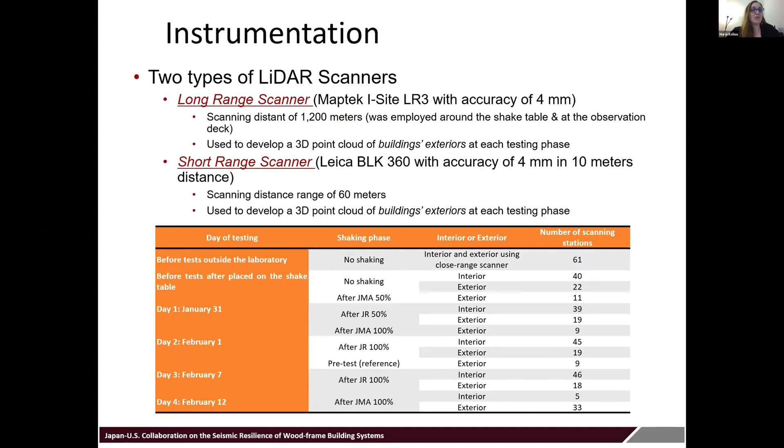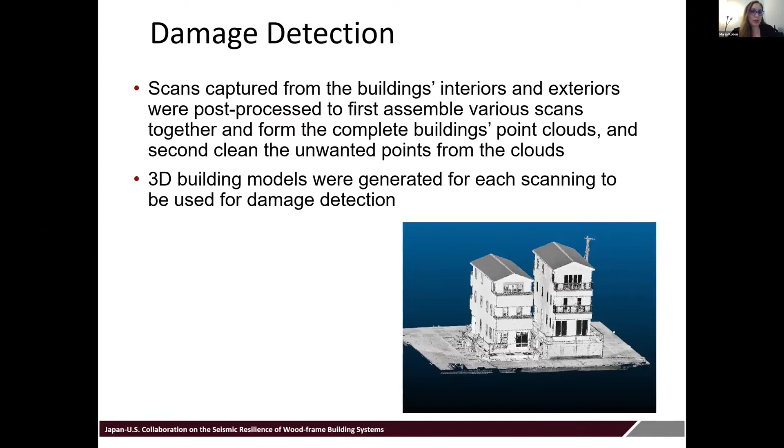As a few sample results in the next slide, we have that last day, which was 100% Kobe, and that's, I think, building B. You see the distorted column after the last day of testing on the left side. In figure A, you can see the photograph taken by a camera, and at B, you can see a screenshot of the column from the LiDAR point cloud. So we could actually measure how much the distorted column had moved in terms of the angle.

Also in the next slide, another type of measurement that we could perform with the point cloud was the damage to the 2 bracing elements. You can see at figures A and C are the photographs, and B and D are what we actually got out of the point cloud. So we could measure out of plane deformation in figure B, as well as the cracks that we could have in the bracing in figure D of the wood bracing.

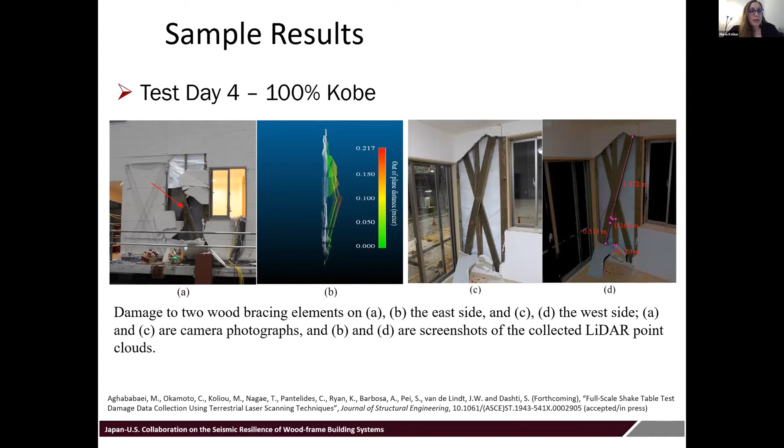In the next slide, another type of results and measurements that we could identify was from the 3D models. We could identify crack patterns. And this is the same test day. So you can see here on the right hand of the figures, we have the photographs, and on the left hand, we have actually the point cloud. So you can see that we have identified all the different cracks, and with yellow triangles, you can see the area that fell out, that actually got removed or damaged from the test. And in the next slide, this is from building A. This is from building B, which was less damaged than the last shake table test.

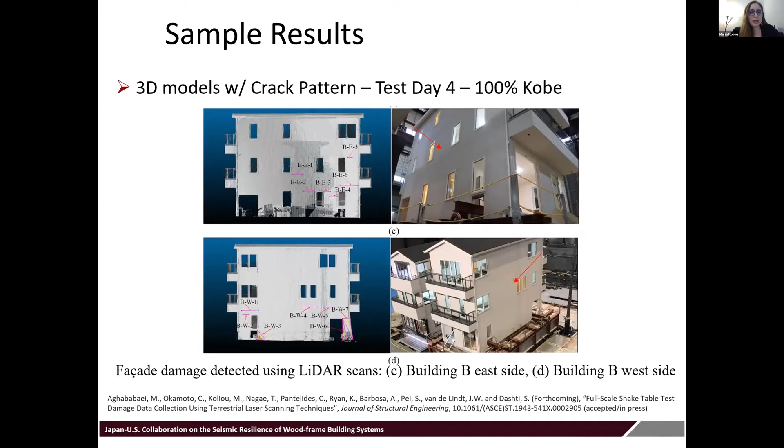In the next slide, we could measure the length of the different cracks and damaged areas as well. We have provided all that in the journal paper, Journal of Structural Engineering, which is in press, coming out soon. That was a collaboration in publication with Professor Nagae.

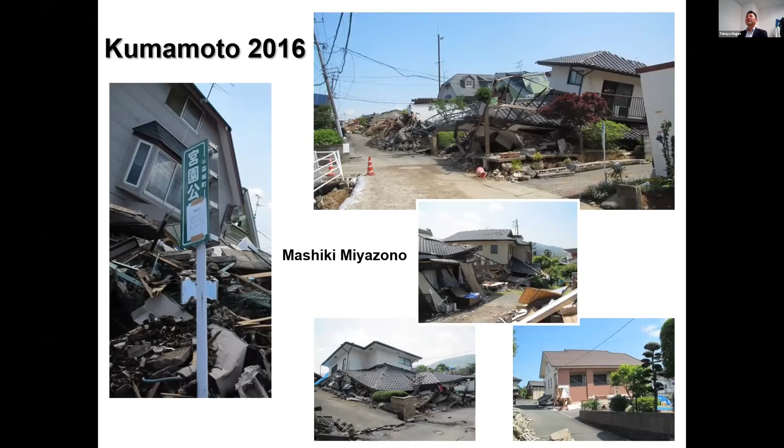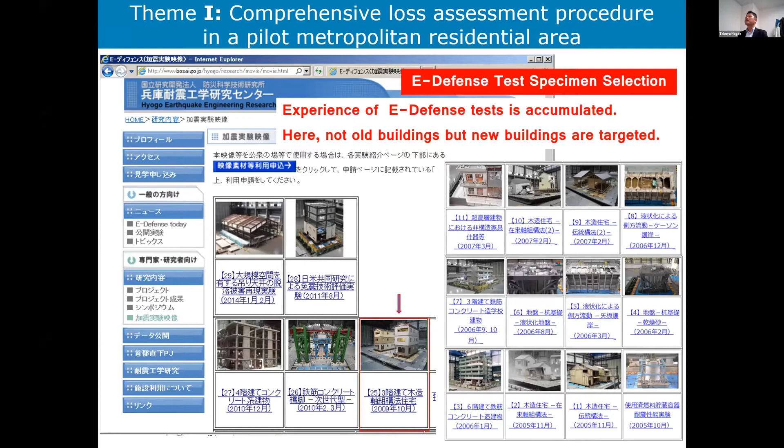The project was started right after the 2016 Kumamoto earthquake. The Kumamoto earthquake showed very comparable demands to the 1995 Kobe earthquake. We have to consider such demands around the Tokyo metropolitan area. In this project we focused on new type wood residential building structures, not old ones, but new type buildings. E-Defense has enough experience on old type buildings.

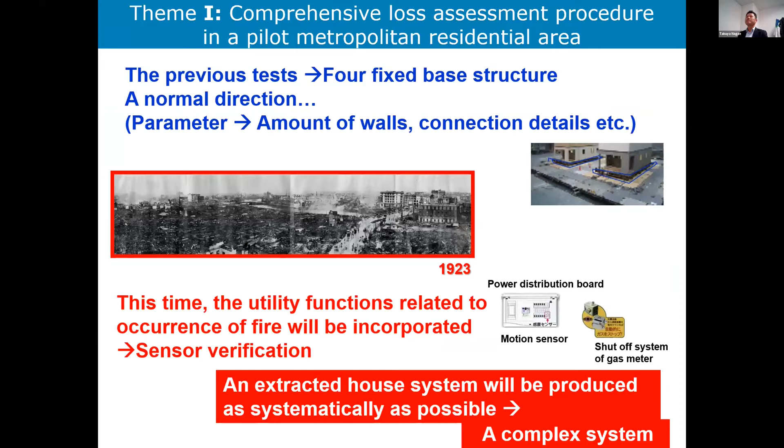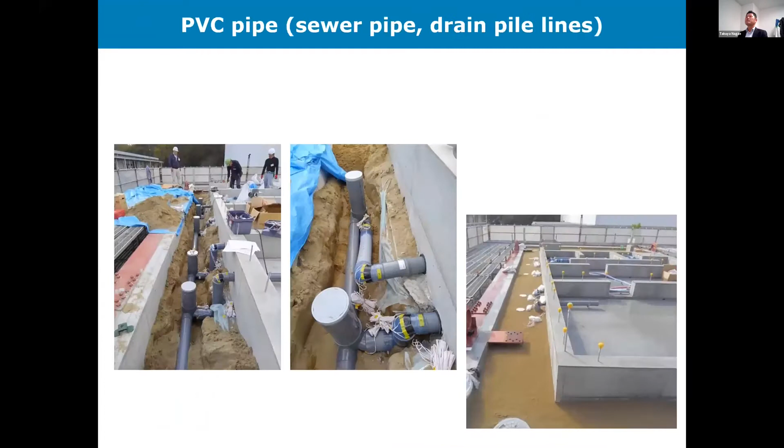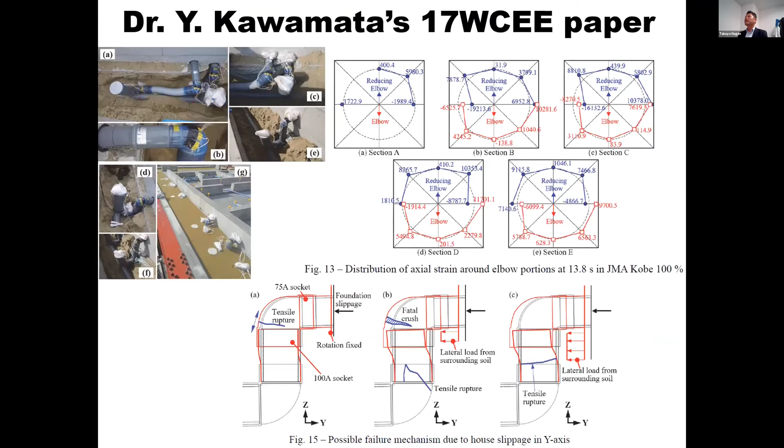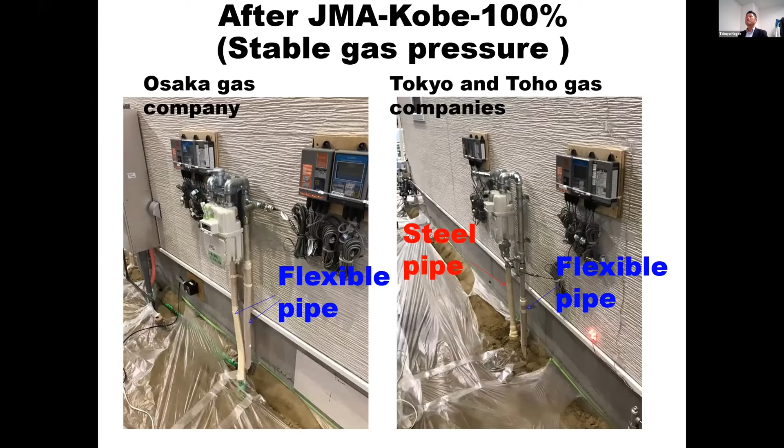A full-scale structure foundation soil system was completed for the test. Pipelines are installed to represent important functionality of a residential building, and Mr. Yamada designed a reasonable test setup protocol. In the test, the building showed damage to the upper structure as well as the pipelines. Dr. Kawamata investigated PVC drain pipelines deeply and presented such a paper. Flexible gas pipeline showed high seismic performance. As well, if you use high specification for drain pipeline, you can enhance PVC pipeline around the joint.

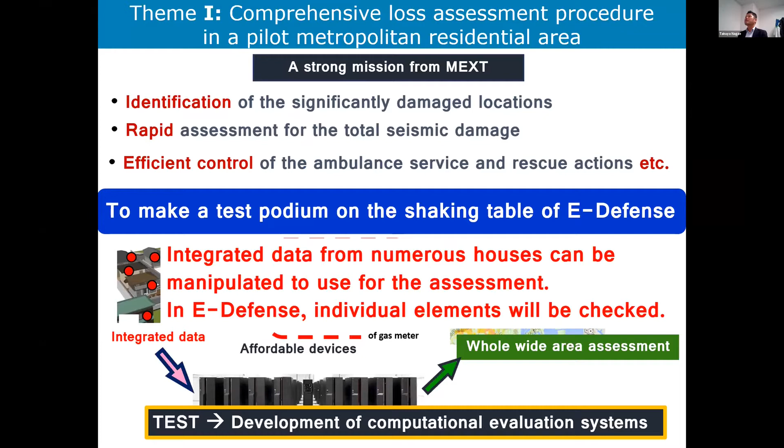One important column of this project is the CT monitoring system, a comprehensive system. Many kinds of sensors are installed in the system, and Dr. Hayashi presented such a paper already.

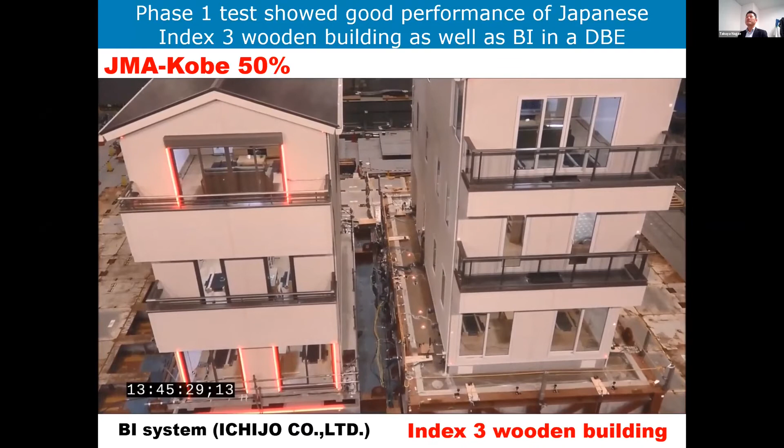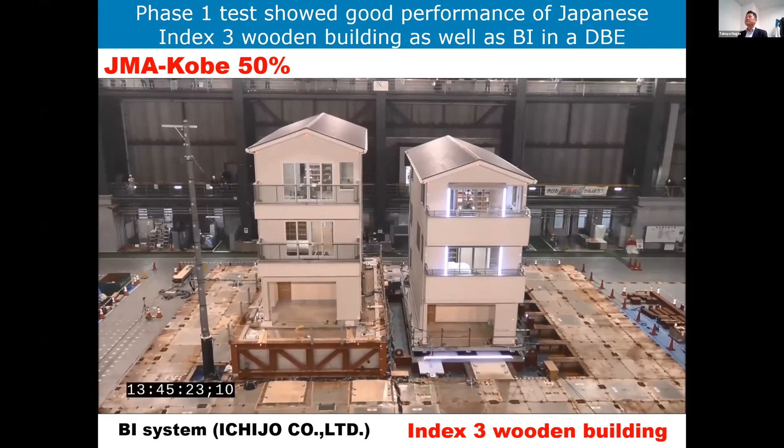Now, seismic performance of residential buildings. JMA Kobe 50% is DBE apparently, and the index 3 residential building adopted in this test showed good performance given input of DBE with no sliding at the foundation. So no sliding at the foundation, and the maximum drift angle was less than 1% at the first story. So quite high performance in the DBE event.

On the other hand, in MCE, JMA Kobe 100%, sliding occurred at the foundation, and the maximum drift angle remained at most 1.5%. So this is the very first test in the world of full-scale structure and soil foundation interaction in reality.

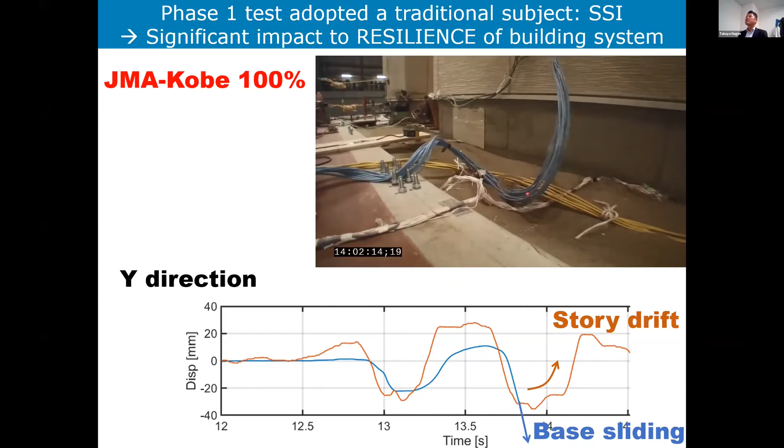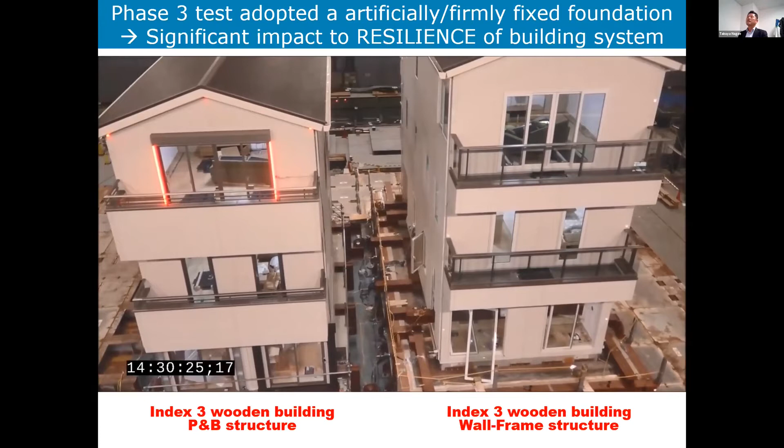So you can see the sliding consumed the demand, sliding of the system instead of the upper structure. This is a very strong message to us. Again, once we adopt a very artificial foundation, a completely fixed foundation, this is artificial again. So you can see completely messed up upper structure without any sliding at the foundation. So this is a very conventional, traditional testing protocol to find the capacity of the upper structure.

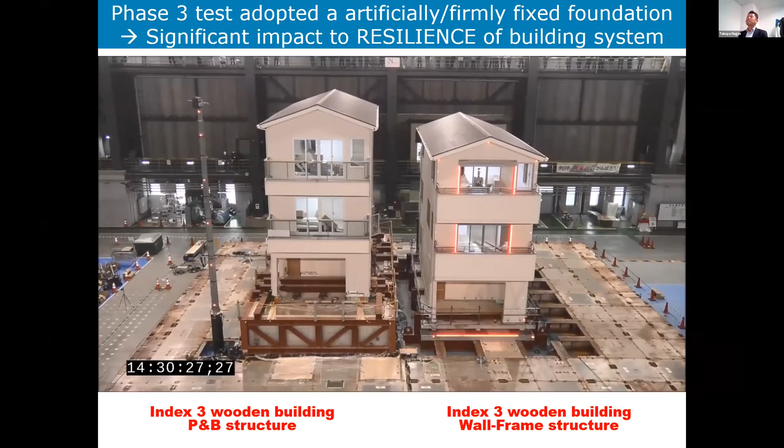So how can we explain such phenomena in design practice? This is a very high hurdle. We have to continue to enhance our capability for practice to reproduce or represent realistic phenomena, which has quite high impact on behavior. Incremental dynamic response analysis is quite a strong option.

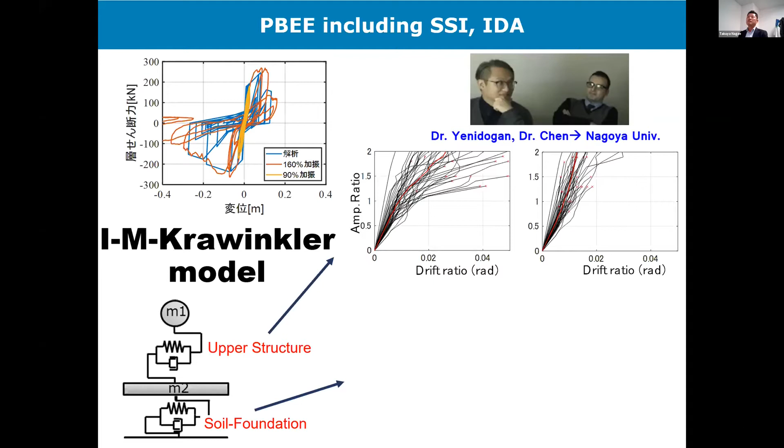Once we secure reasonable parameters, it's quite hard, but once we secure reasonable parameters, we can use this traditional PBEE methodology proposed in 2001 or 2000. The response of the upper structure is mitigated statistically given foundation sliding once you incorporate such a system into incremental dynamic response analysis. So this is quite an affordable option.

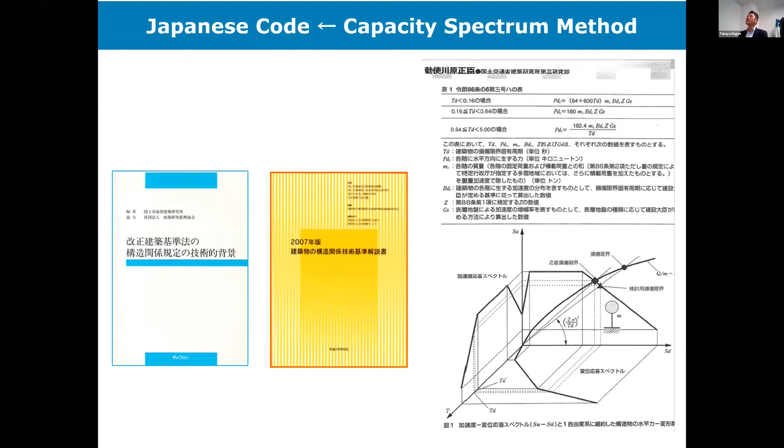Next, in the newest Japanese code, a capacity spectrum method is available, which is not very famous and also not very popular in practice. You have to understand quite a high-level, practical methodology, but you may incorporate such methodology for the representation of sliding.

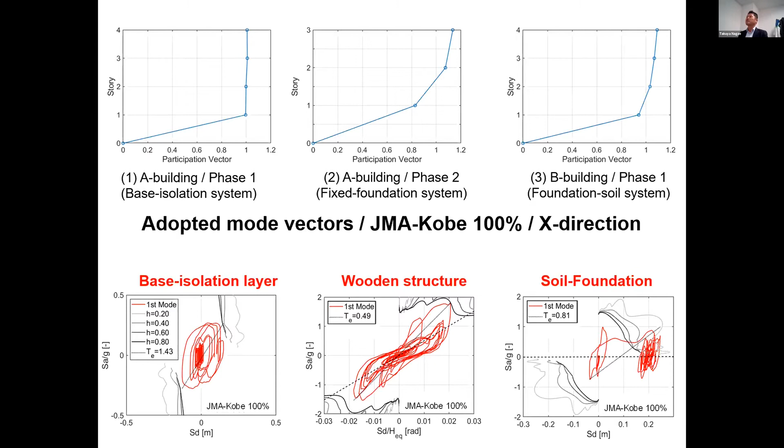The left graph shows the base isolation system, the wood structure system in the middle, and the right side the soil foundation system. So high inelastic behavior, but very consistent to the capacity spectrum format. You may use such a format for practice, even for soil foundation systems, which is completely ignored at this stage. In the near future we have to try to disseminate this, because this is reality. And the base isolation system is quite highly produced artificially, so quite reproducible.

Not just JMA Kobe 100%. JR Takatori 100%, you can find very consistent format results, including soil foundation system. So this is one more strong option in our country, even in US.

According to a rumor, capacity spectrum method is not very popular in United States. I don't know.

So in this project, such target is very high according to current practice stage. So at least in this project, we have to continue polishing numerical analysis technology, methodology. And my student is now struggling with such numerical approach, how do you say, training period.

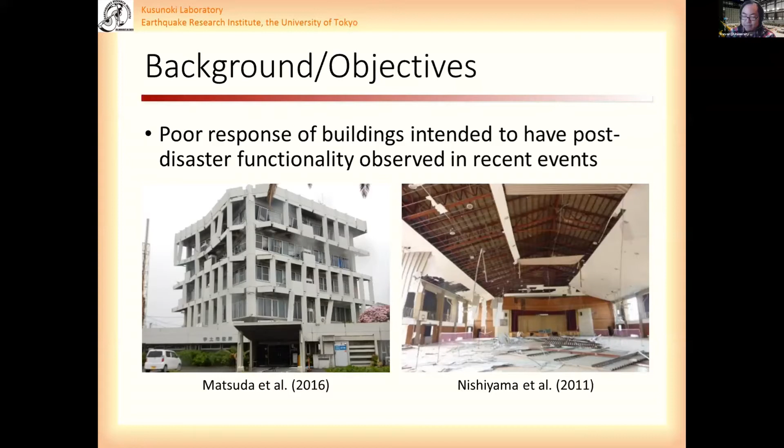So for example, on the left, this is a city hall building that was quite significantly damaged in the Kumamoto earthquake. And then on the right, we've got a school gymnasium that was meant to be used for temporary shelter purposes that was damaged in the Tohoku earthquakes. And so to address these issues, there was a new performance objective that has been proposed recently.

Firstly, the base shear coefficient must be at least 0.55, which those of us who designed buildings before know that is a very, very strong building. Secondly, under the severe earthquake motion, that's similar to either the ULS or sometimes the design basis earthquake, the peak interstory drift should not exceed 0.33%. Once again, this is a very stringent performance objective. And finally, the members should be mostly elastic under this particular event.

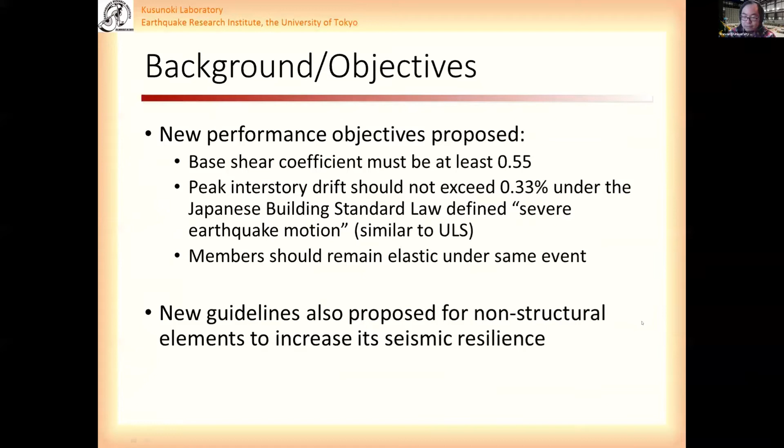And there's also been some guidelines regarding non-structural elements as well. And so to address this issue, one of the solutions that was conceived was to utilize the cladding elements in the structural response, since we need to use cladding elements anyway. So there were two alternate solutions to this.

The first is what we call the seismic gap detailing, where we break the cladding elements into 3 sections: the wing walls, the standing wall, and the hanging walls. And the horizontal wall elements are not connected to the column on the wing walls. And this is to ensure that the plastic hinge location occurs where we intend, and to also minimize damage to the wall elements itself.

On the right side, we have what we call the cut reinforcing detailing. So in this case, there is no gap, but the reinforcing does not go all the way through. So the concrete there still acts in compression. So this is one part of the test that we were interested in.

The other part was regards to structural health monitoring. And the reason for this is that following major earthquakes, obviously building inspections would be required. Imagine in a very large metropolitan area like Tokyo, this can be very labor intensive and time consuming.

And so we may have people unnecessarily displaced from their homes or businesses for a very long duration, which has very large socioeconomic effects. And sometimes a building with hidden damage may collapse during a strong aftershock or subsequent event. These need to be identified.

And so Professor Kusunoki Sensei proposed a method to estimate the capacity curve of the building based on the acceleration results. And then based on this capacity curve, we can estimate the level of damage in the building.

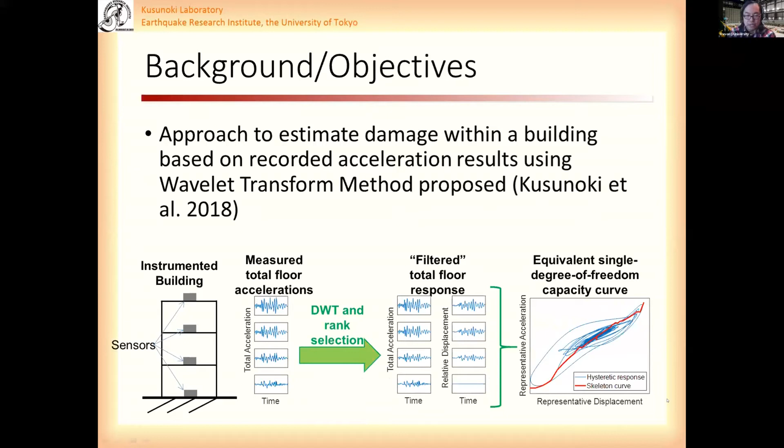So based on that, the main objectives of this test were to identify if the structural solutions proposed are able to satisfy the performance objectives, evaluate if the structural health monitoring approach is capable of predicting the building's damage level, and finally to evaluate if the improved non-structural element detailing results in improved resiliency. There were also other objectives covered, particularly from our US colleagues, but they'll discuss it more in their presentations. So let's have a quick look at the test setup.

So this is an 80% scaled building, reinforced concrete. You can see some non-structural elements on the photo on the left. So we've got tile exteriors on the right-hand side of the bay here, windows on the second and third floors, and also ceilings on that side as well.

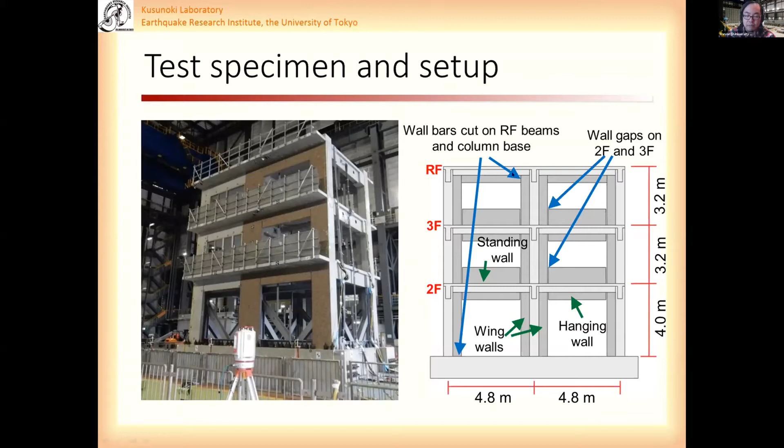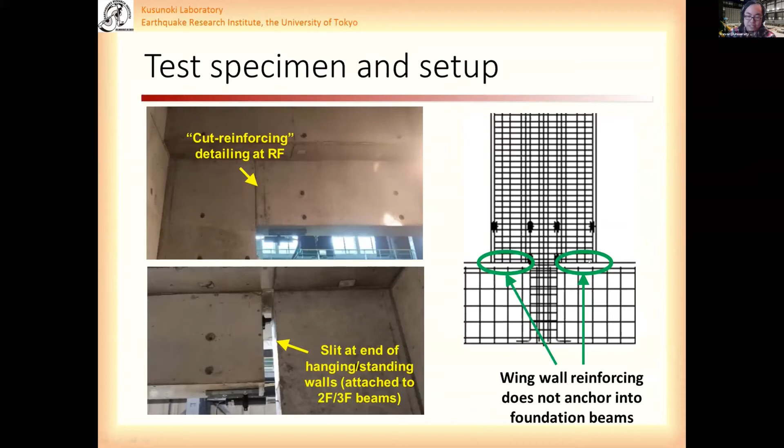From the structural part, we have the gap detailing on the second and third floors, and the cut reinforcing detailing at the top floor and the base. So just a bit more photos on that. So when we look at the base, for example, we can see the column reinforcing does penetrate all the way through to the foundation beams, but the wall reinforcing does not. So these sort of act in compression as well.

For ceilings, ideally we wanted to test different types on the same floor, but due to space limitations from instrumentation, we can only do it on one bay. So on the third floor, where the acceleration is higher, we have the more resilient option, where we have about a 6 centimeter gap around all the edges and bracing in the ceiling. On the second floor, it's connected on all sides with no bracing.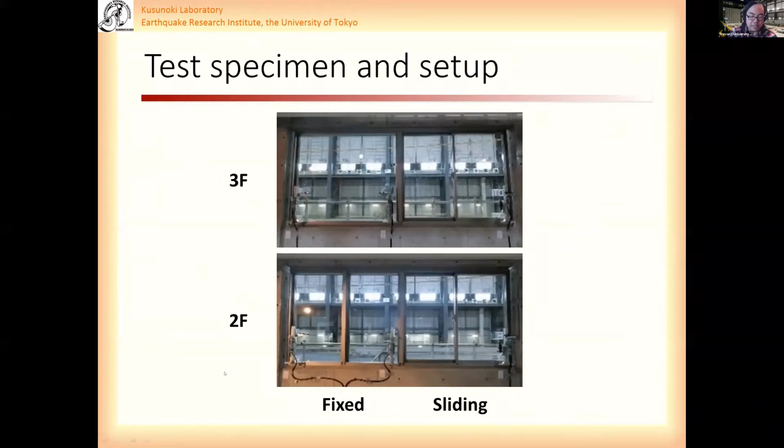Windows on second and third floors. On the right side, we have the sliding windows. On the left, we have the fixed ones. On the third floor, we have a single panel, and this is expected to fail at a lower drift. Second floor, we split into 2, and the drifts are high on the second floor as well.

For the exterior tiles, we use 2 types of adhesive. On the left side is a mortar adhesive, and we can see it's a bit thicker. On the right side is more flexible, so the tile shouldn't fall off during the shaking itself. And finally, we've got some piping on the roof where we tested different types of base connections.

With regards to instrumentation, we had laser transducers, displacement potentiometers, and different types of sensors to check whether the cheaper options are able to give us as accurate results as more expensive ones. Obviously, there are others that were used as well, such as strain gauges, other laser type measurements to measure drifts, and so on.

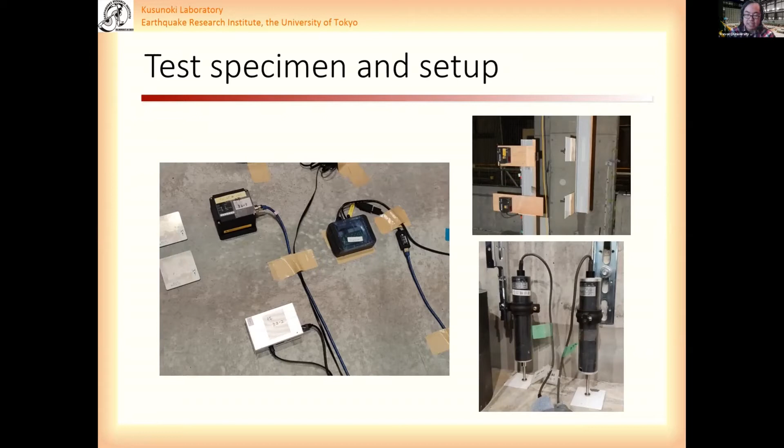For the ground motions itself, we use an artificial record where the 100% scale is equivalent to the code design level. And we ran this 5 times using different scale factors to check different performance objectives. This was done over 3 different days, and at the end of each day we did a crack check to see how much damage was in the building. Obviously, we can't do it after every single test because starting and stopping the shake table was very time consuming and also quite expensive as well.

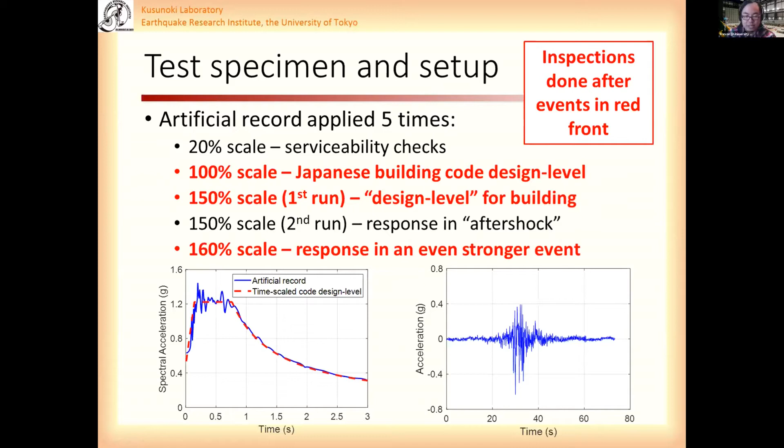So let's briefly look at the test video. I'm going to jump straight to the 150% one because there wasn't much happening in the 20 and 100. And I believe this one was the one that those of you who were here last year had a look at.

So during this particular test, you'll see some cracks occurring between the beam and the wing wall elements on the third floor. And somewhere soon, you'll start to see some tiles falling out. Not too much damage at the column base at the moment, but you can sort of see it starting to lift up a bit, almost like a rocking wall.

And once again, that's because we don't have any reinforcement going through to the base in the wing walls. This is the very next one, which is the second run of 150. If you look at the column base, you start to see more response there, and you can also probably see some concrete spalling out the side as well. And we also got some tiles falling out from the third floor in this case. I should mention that for the beams, we are looking at the mortar side. Unfortunately, I don't quite have the videos for the flexible end. But we can see that with the mortar detailing, we are getting quite a bit of tile fallout.

And the fun one, which is the 160 events. This test was stopped prematurely because I believe the velocity demands exceeded the shake table capacity very slightly, so it was stopped prematurely. You can also see some tiles falling out from the base of the column as well, indicating the amount of damage that we are starting to get down there.

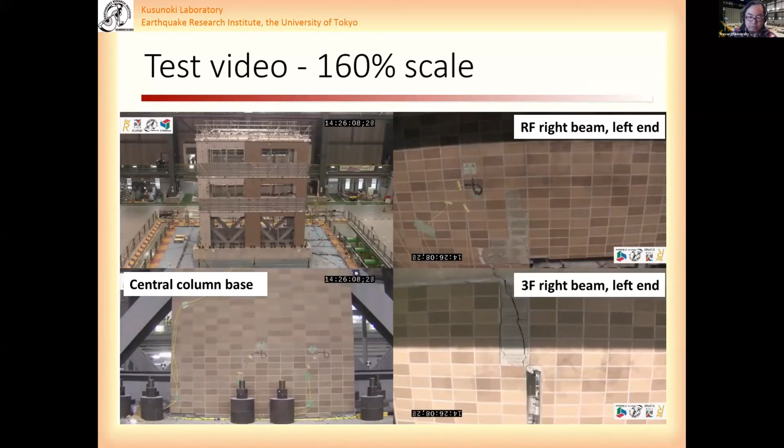Key findings from the structural side. This is the cracks that was observed in the third floor beams. We can see after the 100% shake, it's a very small crack, so it was considered minor damage. It's starting to get more significant after the first 150, and after the very last shaking, there's been extensive spalling, and the bar has started to buckle a bit, but not too significantly.

At the roof level, the beam itself had smaller crack widths, so they tend to perform slightly better there. Unfortunately, though, the hanging wall had quite large cracks in there. But we should remember, though, that we do not have the reinforcing going through those cracks, so this looks bad, but it's not actually that bad from a structural viewpoint.

From the column base, we can see some corner crushing occurring after the first 150. And by the 160, there's been quite extensive damage down there.

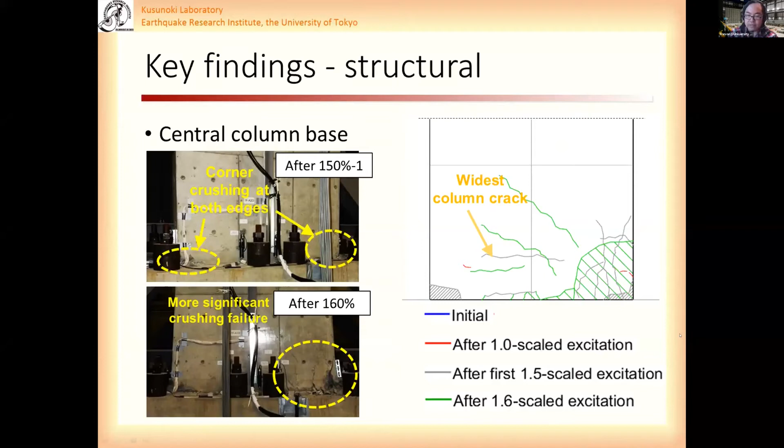The floor slabs wasn't too bad in the first one, about less than 0.2 as well. But yeah, after the 160, it was kind of getting a bit on the scary side when you're starting to see cracks about 12 millimeters wide. In imperial units, I believe that's about half an inch.

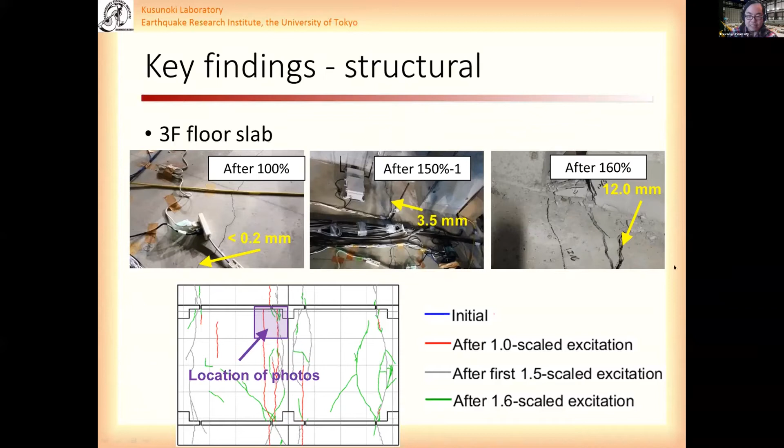Interstory drifts, we can see for the 100% case, it more or less satisfied the 0.33 drift limit. So in other words, this satisfied one of the performance objectives that we had specified earlier on.

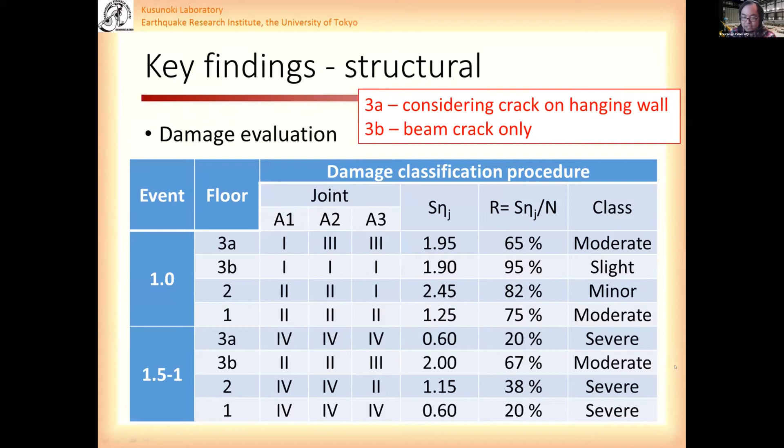For the 150% case, it was starting to get quite significant. And for the 160, we considered it to be close to collapse, so we didn't consider it there.

This is looking at the structural health monitoring approach by Kusunoki sensei, where we can see that at 20%, there's almost no damage. At 100%, minor or slight. And also note that it's in an elastic range, so this satisfied yet another performance objective.

For the 150% case, it was severe, partially damaged. And by the 160, it was close to collapse.

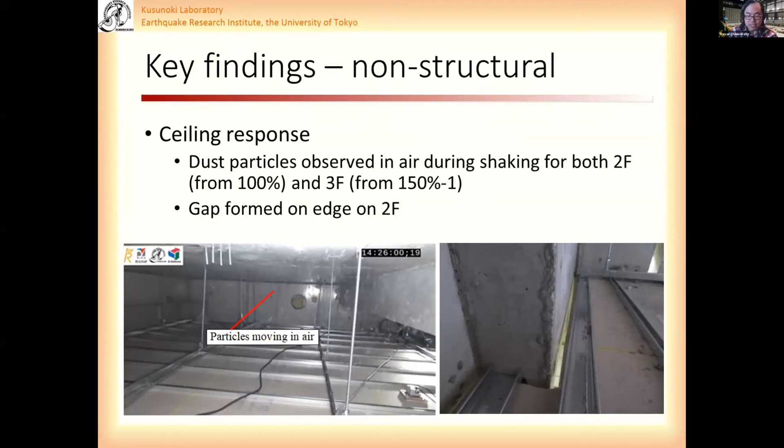I'll briefly run through this non-structural response. So this here is the ceilings. Both of them performed reasonably well, actually. But what we noticed is that on the second floor, there has been some gaps forming, and the engineers involved in this particular aspect judged that the ceilings was potentially on the verge of failure on the second floor. So this kind of showed that the third floor building, despite the third floor ceilings being subjected to high accelerations, looks to have performed better overall.

For windows, there were cracks on both the second and third floors that actually occurred earlier than what was anticipated, so they're still looking into the reasons for that in more detail.

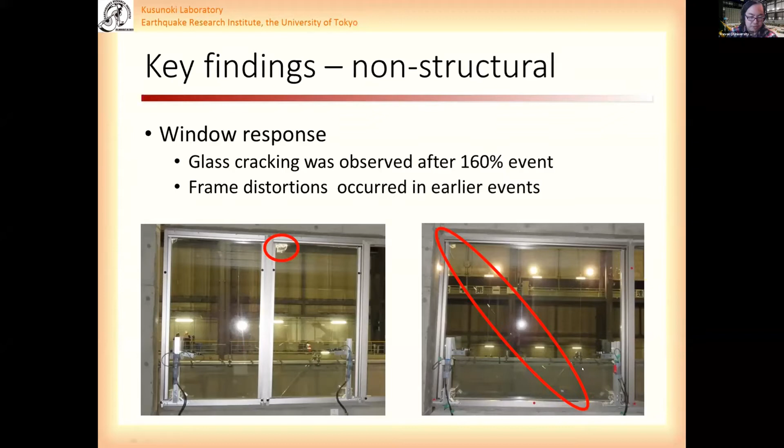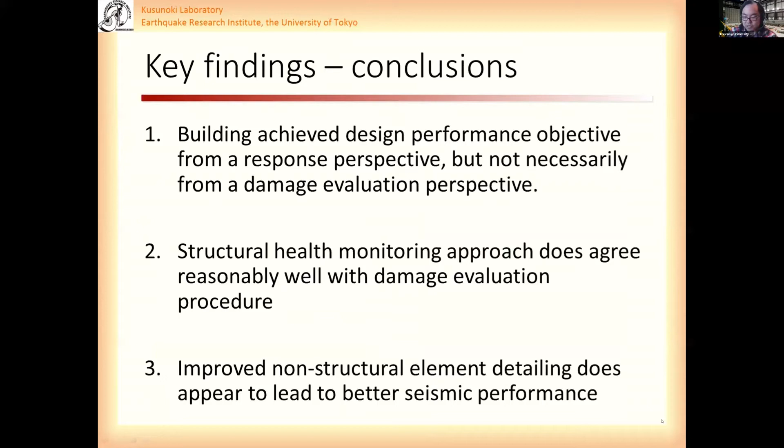So key findings from the structural test itself was that the building did mostly achieve the design performance objectives. The structural health monitoring does agree reasonably well with the damage evaluations, and the improved non-structural element detailing does appear to lead to better seismic performance.

Just to briefly wrap up, we did have a blind prediction competition for this particular test. The motivation was that structural analysis tools have been on the rise in recent years, but it's not clear how accurate they are for modeling uncommon building types. Because our building is a relatively new solution, it's a great opportunity to evaluate the accuracy of these tools and assumptions.

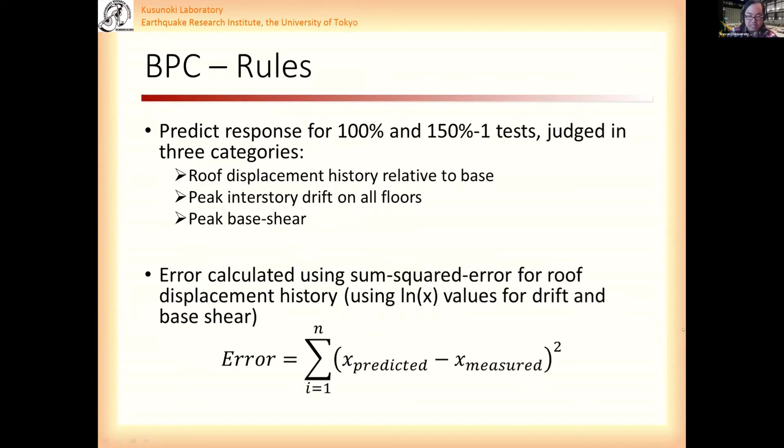For the 100% and for the first 150, we asked participants to predict the roof displacement history relative to the base, peak interstory drift on all floors, and peak base shear. We used the sum squared error for calculating the error.

In order to select winners, we ranked teams based on each individual category, then summed up their ranks to obtain the final score, and the teams with the lowest sum score were declared the winners. We announced the competition in September 2019.

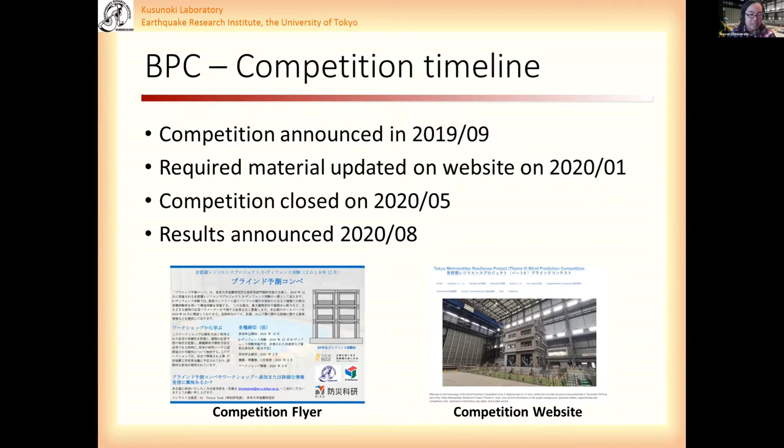Everything that participants required to perform the analyses was uploaded by January of this year. The initial due date was early April, but due to COVID, we had to extend it to May, and we announced the results in August.

16 teams joined in particular: 12 from China, 2 from Japan, 1 from New Zealand, and 1 from Greece. Originally there were meant to be 30 teams, I think it was actually more than that, but due to COVID, a lot of teams had to pull out, especially because this was held at the time when the first waves were happening global-wide.

We are having part 2 of the competition, where we are asking participants to predict the response for the next 2 tests. We've provided the acceleration results for the previous test, so that can be used for model calibration. One motivation was to see whether we can use such results in practice to better estimate the models.

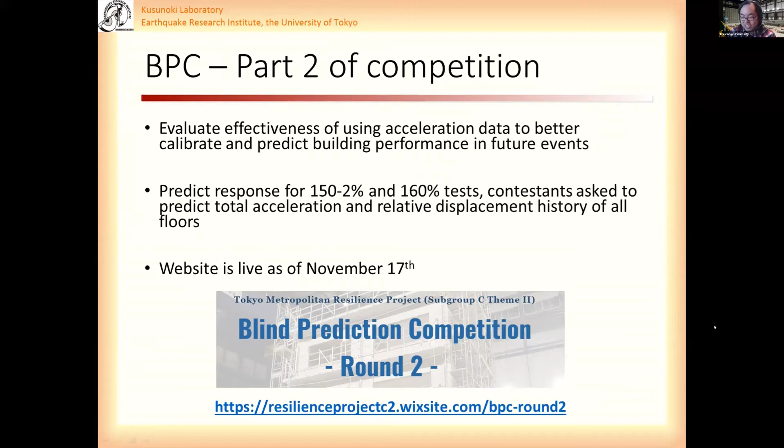The website has been live as of November 17. Unfortunately there hasn't been too much interest so far, but if you can help spread the word, it'd be much appreciated.

Finally, we have a special session at the World Conference next year, if that goes ahead. Please join us if you are available. Thank you very much.

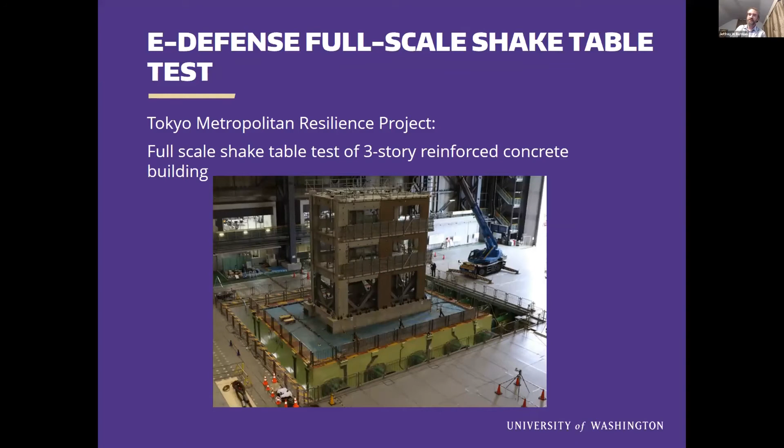The objective here is to do damage-based post-earthquake assessment of reinforced concrete buildings and move that entire discipline forward using new technologies similar to what Maria showed. This will be a lot of point clouds derived from LiDAR data, and the idea is that we're collecting controlled data and then doing data processing on that. I'll skip quickly through the test descriptions since you just saw all of that, but it was a fantastic test.

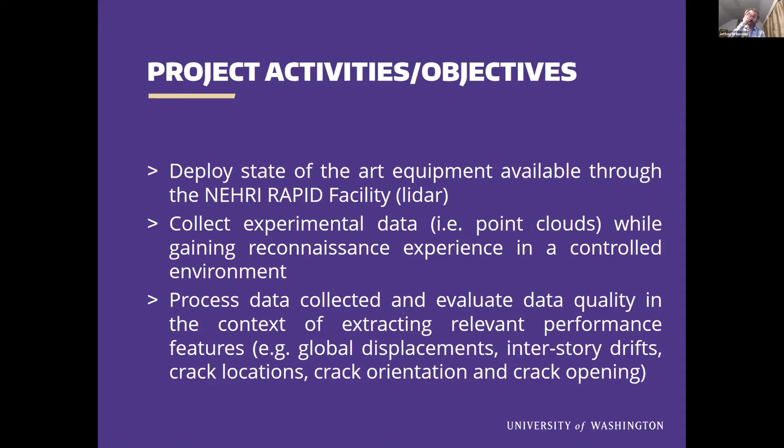So what happened here is we deployed the rapid facilities equipment, largely LiDAR, and collected data from the experiment, which we then turned into point clouds. We're in the process now of processing that data and developing methods to extract damage and damage measurements from it.

The PI is Paulo, Laura Lowes is co-PI, there's a graduate student, and we're also working closely with Muhammad at Reno on his DIC work, which you'll hear about next.

So again, here's the test specimen. There's us, several of us that made the trip out, and Professor Nakamura probably looking at her watch saying, how late do you guys need to go?

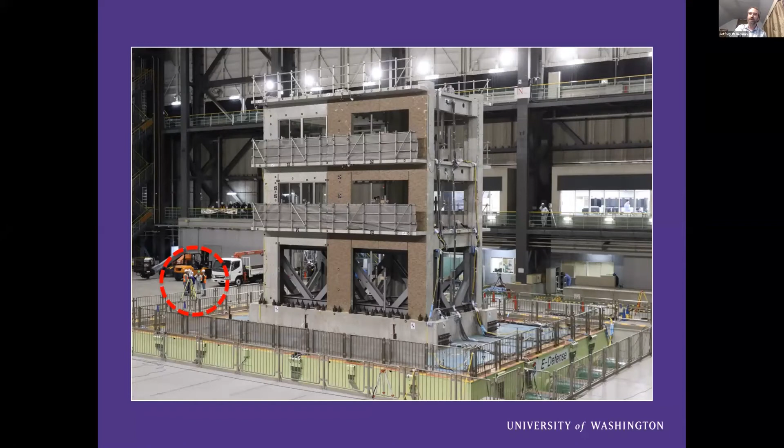We're running one of the laser scanners. The way this went was we did baseline scans before the first day of testing. Then there were two ground motions run, 20% of the design wave and 100% of the design wave. Then we did another set of scans that night. They ran 150% of the design wave, and we did another set of scans. On day 3, they ran 150% again, and then the 160% that Trevor showed results for, and we did another set of scans after that.

So what did we use? We used close range laser scanners. These are highly portable instruments that we took a whole lot of data with. I run the rapid facility along with Joe Wartman. This is generation 2 of our laser scanners - Maria used generation 1, and I think we're able to do better measurements now for crack identification and things like that with our current equipment.

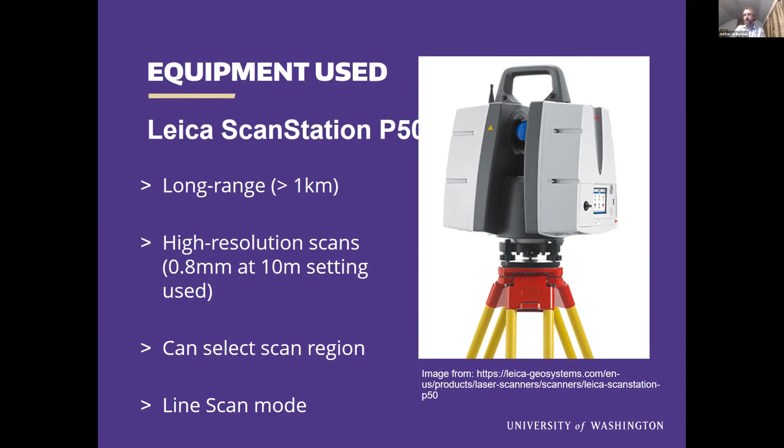So this is a super fast laser scanner - it takes millions and millions of points, amazingly fast. And then we have a really high resolution scanner, the Leica P50 scan station. It's really the highest resolution, highest accuracy terrestrial scanner that's out there right now. This is what we're currently recommending people use if they're interested in capturing subtle details of damage in structural systems. We also brought along a total station to do global measurements.

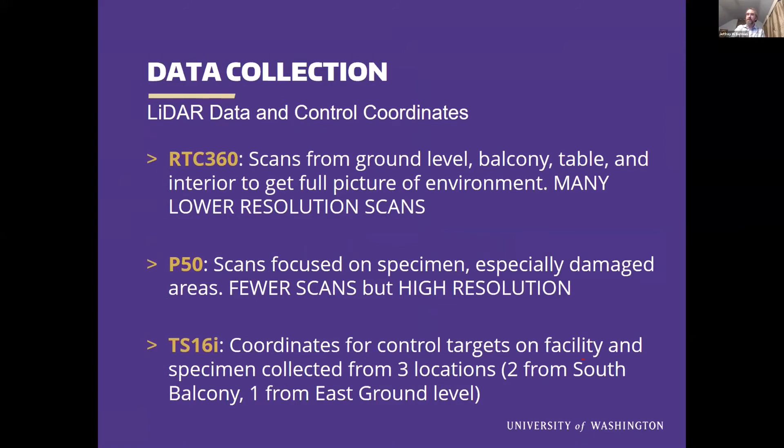So we collected all this LiDAR data at the instances we talked about, and then we put all of it together into very rich, detailed point clouds. The point clouds contain XYZ coordinates of each time the laser hits the test specimen, as well as each point tagged with an intensity and RGB color values. So there's a richness to this data that's not necessarily available from photographs.

For some of the detailed work, we set the P50 up after test 3 in 11 different positions inside and outside the building, and did very detailed scans of the specimen - we'll zoom in and look at some results of that. But there's a huge number of points that are collected.

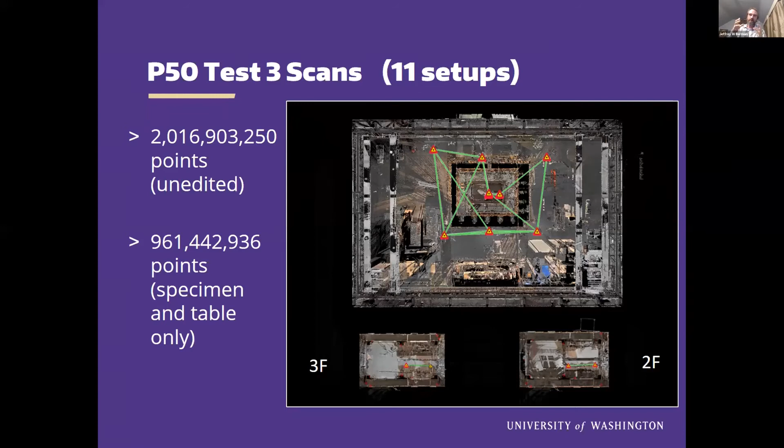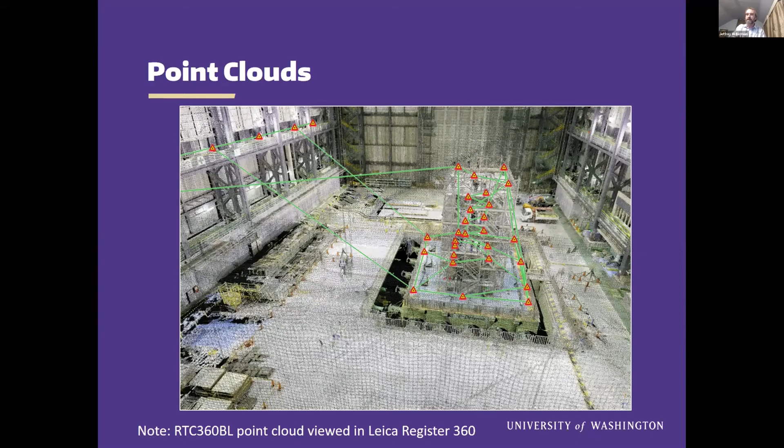A lot of it is the facility and things we don't want anything to do with, so our first job is really to clean all of this out and focus on just the data that's of interest, which of course is the specimen. With the smaller scanner, we did 81 scans after test 3, and the number of points was absurd - the data is a pretty heavy lift here. So the first thing we do is clean everything out. This is illustrating the point cloud, but I want to get to the detailed analysis of the damage - here's a zoom in of one of the cracks forming in the beam.

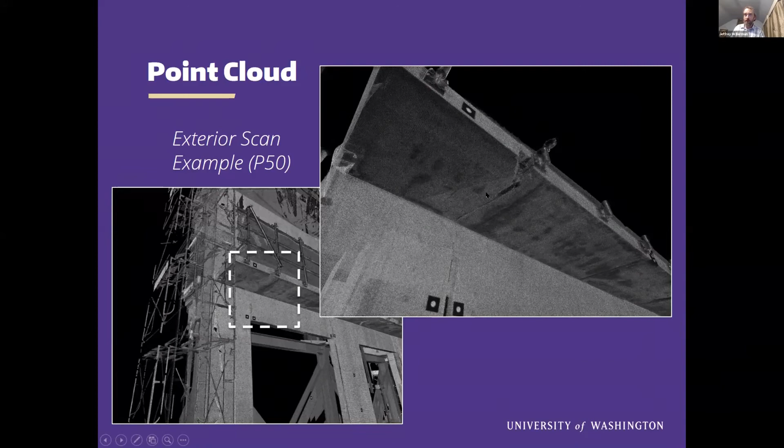You can see the gap in the spandrel that's detailed. This is a lower floor where a seismic gap was provided, and we can see the crack going up into the slab. We have some detailed measurements here. We can see cracks in the reinforced concrete beam elements from the inside and spalling. If we look closer, we have really high resolution in these areas, giving us a really good picture of the damage, and we can take very detailed measurements of these cracks from the scanners, from the point cloud data.

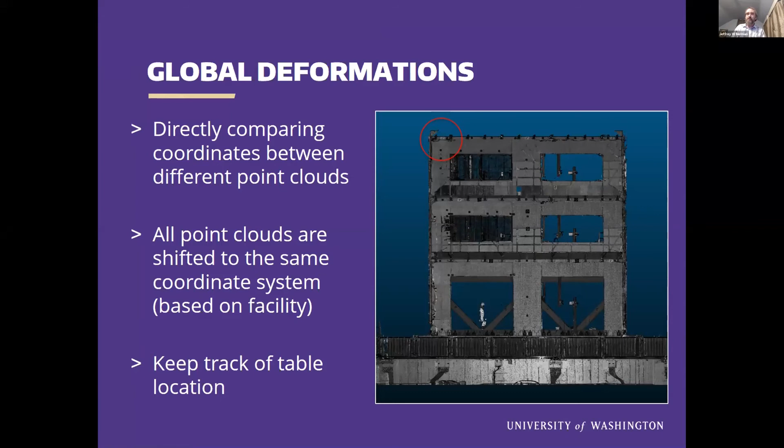I'll go through how we're doing the crack measurements in a second, but we're also measuring global deformations with fixed points on the specimen. We had a number of targets useful for comparing before and after shaking. We compare the target location in a baseline scan, since the middle of the target is an easy point to locate, though we could use any point within the 3D point cloud model. We're able to see the difference in deformation between the baseline configuration and after test 3, corrected for shake table deformation or displacements. So this is the actual residual deformation of the specimen after test 3.

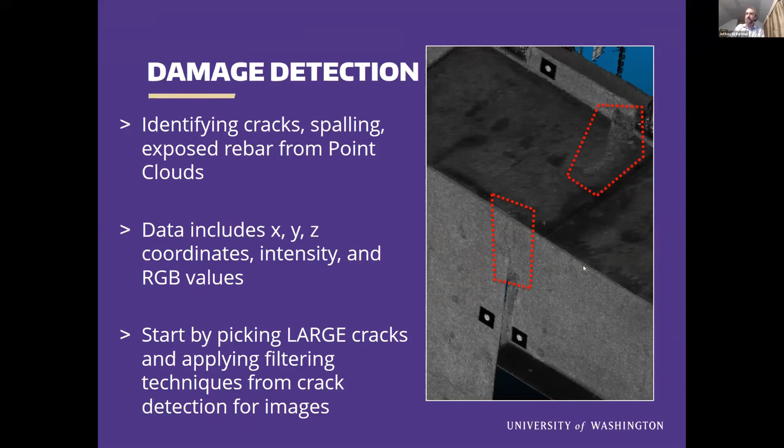We're also doing a few things trying to work on damage detection. This is relatively new - we're trying to adapt algorithms that have been used in 2D environments from photos as well, so it's very much a work in progress. But we've got some areas with very detailed scan data of damage to this specimen, and I think it's a really rich data set for those interested in algorithm development for crack identification and measurement from point cloud data. It's a super rich data set that's available on DesignSafe now, and folks can go investigate it with their own methodologies.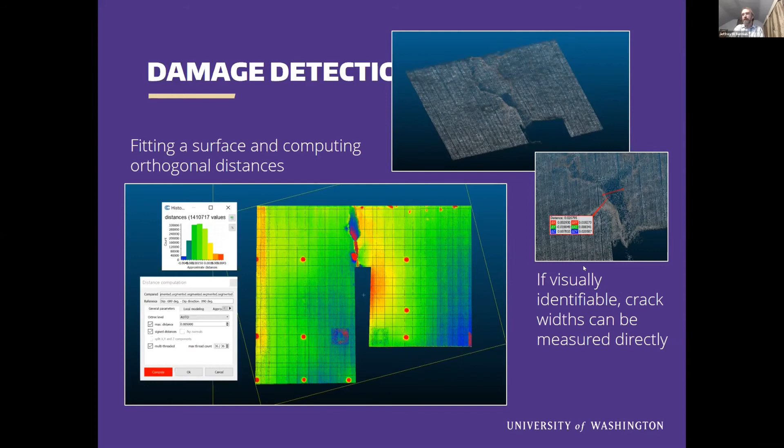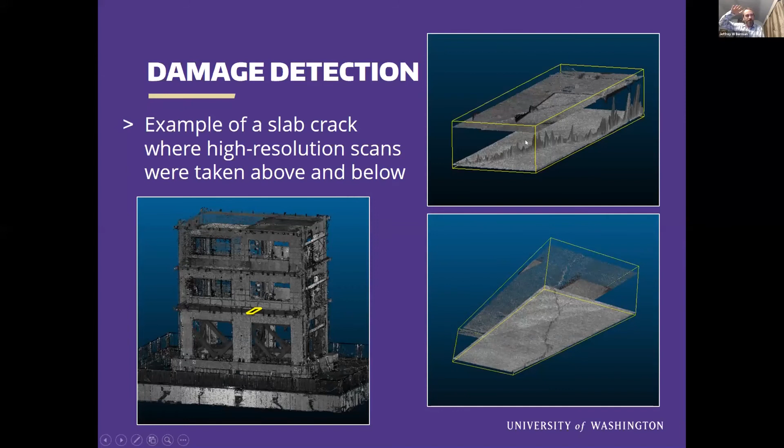We've done some really basic stuff in the beginning, just fitting surfaces and trying to measure the distance from the surface into the depth of the crack. We're comparing our crack identifications and crack mapping from the point cloud to the hand crack maps drawn by the Japanese team in the field. Something interesting we discovered by accident: in this location we scanned the top and bottom of the slab, and we were actually able to connect the crack all the way through. We had a few hits of the laser that went really deep into the crack in the slab, so we could map it all the way through, which is really interesting.

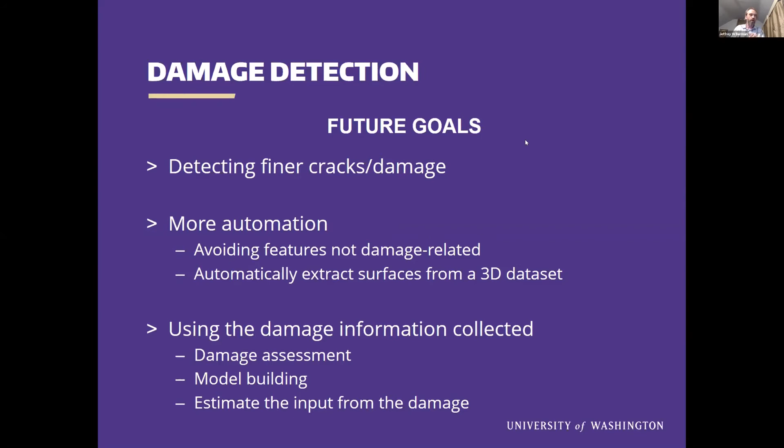We're in the process of exploring different filters and methods. We have distance measurements, intensity, and RGB to work with, so there's a lot of potential avenues for understanding how to find, map, and measure the cracks. That's really where we're going at this point, and this summarizes all of that. I know we're a little behind schedule and don't want us to miss the test, so I'll turn it over to Mohammed.

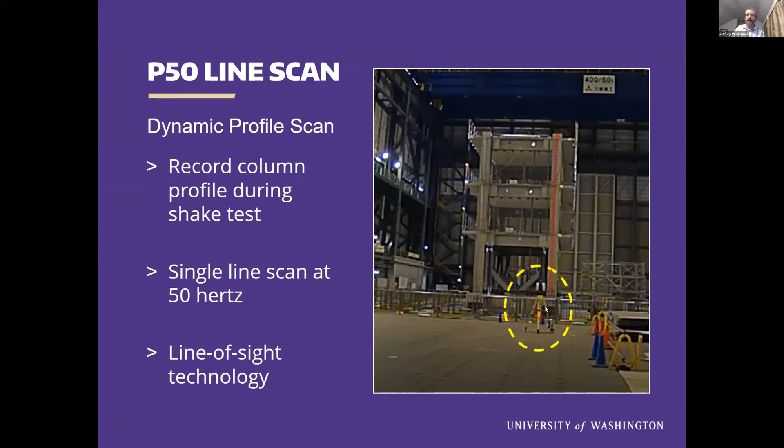I'll just add one final thing - we actually did some dynamic measurements with the P50 laser scanner. We set it up on the floor to measure the displacement of this column during the test at a rate of about 50 hertz, and so far that's been really, really successful. Taking all these points, I'll skip to the end where we compare it to the Japanese instrumentation data. So far it looks like the line scan and the displacement data from the Japanese researchers' instrumentation line up really, really well. So if you want to make dynamic measurements with this LiDAR system, it's looking pretty good, and we can do that.

Jeff, I'm really sorry to interrupt you, but we're a few minutes over. I'm done. So Mohammed, if that's okay with you, we'll proceed with the test observation and come back for the last presentation of the session.

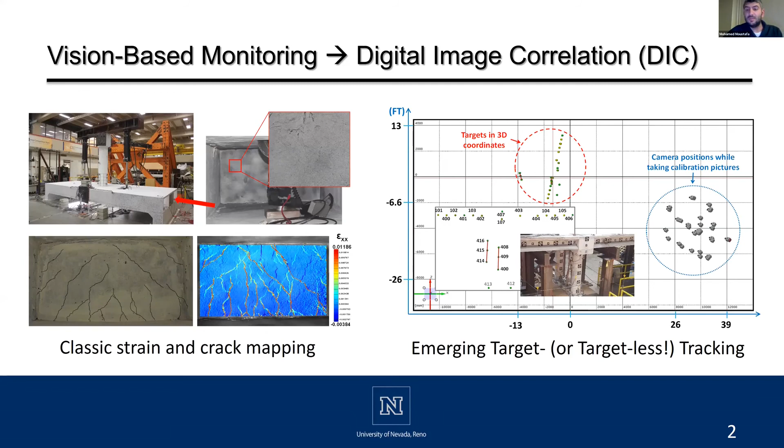So what we are doing - for those of you who are familiar with our shake table test facility at UNR, we have this multi-shake table test facility and we do a lot of bridge testing here. This was the first time we tried to deploy our system here, and the system basically is a pair of cameras. If we are interested in getting 3D deformation, we have a whole bunch of lighting that we shine on the targets, the black targets that you can see here.

Each one of them becomes a sensor, and we get XYZ coordinates from a dynamic response, during a shake table test, or even under ambient excitation, to do structural health monitoring and things like that.

So we tried the technology for the past few years at UNR, and it worked fine. Then we were presented with the opportunity to be part of the team to monitor this at E-Defense. So we worked with the University of Washington, and collectively from the US we had a team. They focused on damage detection, as Jeff explained in nice detail, and you have seen all these great pictures that they showed. We on the other side were focused on the dynamic response monitoring.

We deployed two systems for this - state-of-the-art type of cameras. These are like $37,000 pairs of cameras, high speed, high range, and specialized, and also commercial cameras.

So we used $500 type of cameras, and we wanted to cover a wide range of camera hardware and basic hardware capability, to see if we can get the systems to work. These are the targets that we used, and this is the side of the building we ended up monitoring from a platform about 30 meters away. This is a close-up of some of the targets. You can see we use two different types: coded targets for calibration purposes, the larger ones with more rings around the center, and smaller targets which we use many of for getting the dynamic response during the tests.

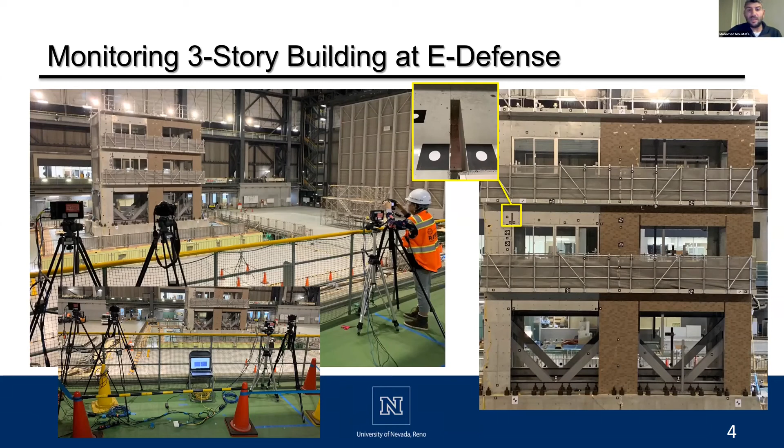So we considered this a challenge. Actually, we didn't consider this a failure. What we wanted to do is see what we can do to enhance these types of pictures, to still get all the results we intended to get.

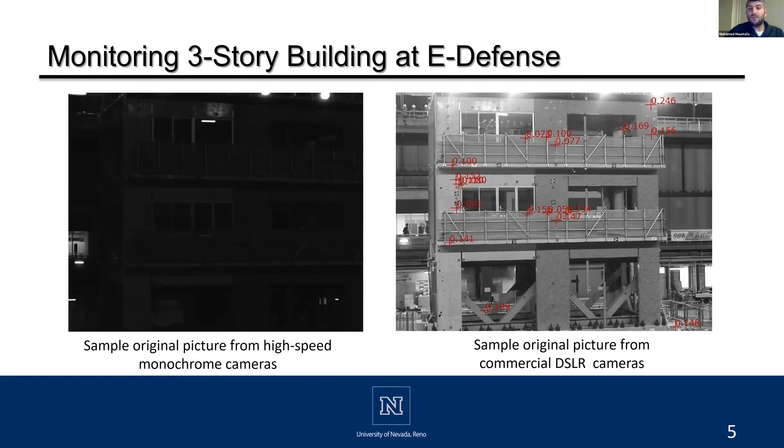So after we came back from Japan, we went back to our lab and tried to devise a framework for image enhancement. We didn't want to only do image enhancement, but also wanted to quantify the accuracy of this image enhancement procedure and quantify the measurement.

We tried this in our lab, and did a whole bunch of static and dynamic tests to verify the accuracy of the algorithms. Once we had confidence in this, we applied it to all the pictures we got from the Japanese test, and it was a great success.

So that's what I'm proud of, that we were able to get a side research study, as I said, as part of this project. So that's the original image as we captured it, based on the setting in Japan.

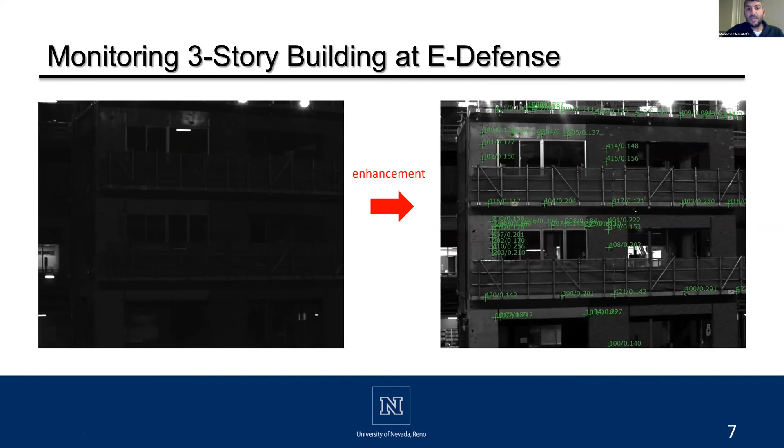This is after image enhancement, and you can see we were able to get every single target, coded and uncoded, from the high-end cameras and from the commercial cameras as well. So that's another example from the lower-end type of cameras, and also with the image enhancement, we were able to get all the targets.

We actually wrote a paper out of this procedure that we tried to develop here, and quantify using the E-Defense test as a test bed. So this is work in progress. But now that we're completely done with the image enhancement, we know that we can get the right data. It's all about generating this data.

Very shortly, we'll also be working with University of Washington and our Japanese collaborators to see how we can share this data and compare it, because there are a lot of things we can compare here. I'll show you some examples next.

The first thing we have in this type of test is a typical shake table test, and you've probably heard about this from Trevor as well. We use ambient excitation or white noise tests, and we do these to perform system identification and structural health monitoring for our structure.

I'm just showing a sample here. Every target, every one of these black stickers that you see, becomes like an accelerometer, if you will. We get acceleration, velocity, and displacement with very good accuracy, because we've been working on accuracy quantification for these technologies, and we've shown we can get accuracies compared to mechanical sensors within 2 to 3%, sometimes even less than 2% error.

So we have confidence in the data, and we wanted to use it now for structural response assessment. I'm showing a sample here of what we can do with this data, from the white noise tests, before even starting any seismic shaking. We can do a full system identification for the building using acceleration data captured from our systems, and we were able to capture the first 3 modes in each direction: transverse, longitudinal, and vertical.

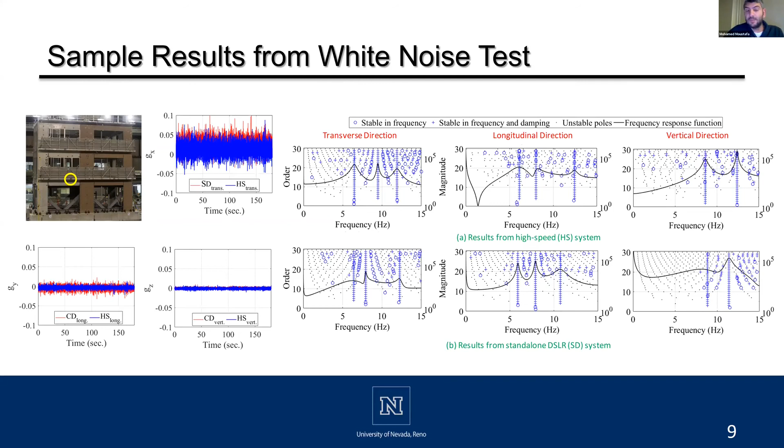So that's one thing we are doing. I'm showing a sample here from the results we got from the original building before any testing, but what we're currently working on is doing this between all 5 or 6 seismic tests. So that's one type of data we were able to get, and this is one type of post-processing for that data, showing how we can use it to assess the structural response of the building.

The second thing is that we are getting displacements, and we're focusing more on displacements here. I'm showing some samples for the next few slides. We're not done with all the post-processing yet, but I can show you some of the results we're getting. Here, what you see in blue and red is a comparison of our two systems, the lower-end cameras and the higher-end cameras, after the image enhancement and everything, of course.

We were able to show, for the first time, I don't think anyone has shown this before in a large-scale test like this, that a $500 camera can work as well as a $15,000 camera. So the hardware itself, we were able to show how to use more feasible hardware for monitoring applications like this.

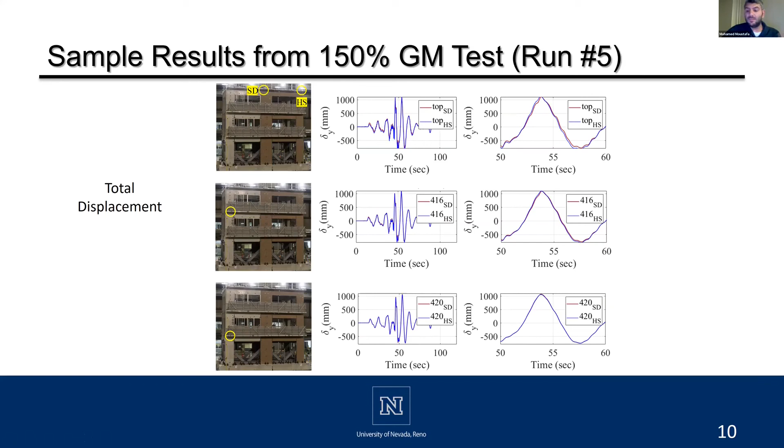So these are the total displacements that we got for the building at different points. I'm just showing some samples here. This is total displacement; you need to subtract from it the input motion or input displacement. You can get the relative displacements, and we can get interstory drifts, which I'm showing some samples of in the following slides.

We haven't post-processed the data from a structural perspective yet, and this is something to do in collaboration with our Japanese collaborators, since they put together this structural system and know what type of response they need to assess. We'll be working with them, but at least we were able to get the relative opening and closing of the gap during the various tests.

Another example here: the 150% test with 2 runs, run 5 and run number 6. That's some more examples from the second test, and that's the total displacement that we were able to get.

We also have some of the targets on the shake tables, so we were able to get the table input displacement and calculate the relative displacement at each floor, and the interstory drift and interstory drift ratios. What you can see here is the interstory drift ratios.

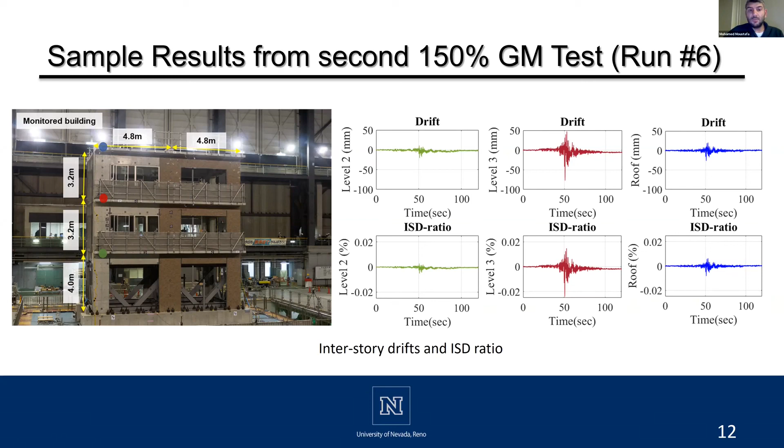How would we use something like this? There's a performance assessment criteria, which Trevor has shown, 2% for example, interstory drift ratio, or 3%. We've yet to use the right limits for the assessment, but at least we got this, and the second floor showed higher interstory drift ratios relative to the third one, the same thing seen in Trevor's previous presentation.

One last thing: this was a 3D system, and although this was uniaxial motion, we were able to capture the out-of-plane response as well. It's minor relative to the in-plane intended motion, but we could still capture the resulting out-of-plane vibration. If we subtract results from two points, we could get some idea about whether any bulging is happening in the wall.

These are some of the ideas for post-processing and assessment of the structural and non-structural components. Our focus now, over the next 2 or 3 weeks, is getting the data set available—we're not sure if it will be published right away, but we're working on this. We'll have the full data set, every black dot target you see here, with XYZ for all the tests, including full displacement and acceleration data.

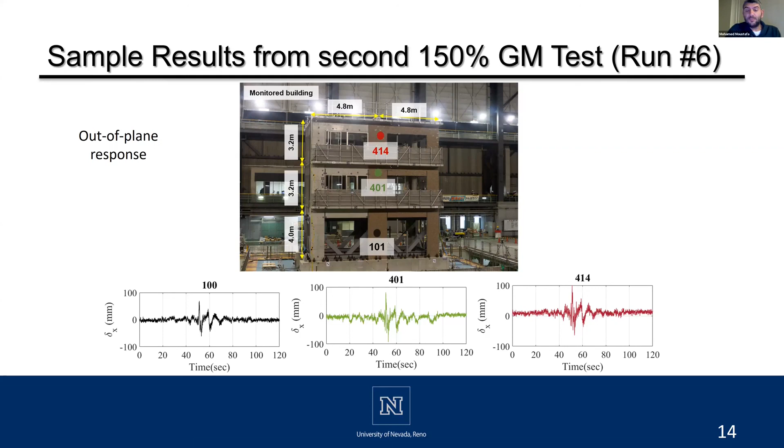So here I was not wearing my concrete hat yet, but I'm a concrete person, so I would love also to wear my concrete hat and go and see how this reinforced concrete structure performs under the different earthquake levels. Using this data will enable us - we got a wealth of data from this vision-based system that we can complement with what you've seen from the UW team and all the sensors that the Japanese deployed, which they'll kindly share with us at some point. That's what I wanted to share with you today, and I'd like to thank you all again for the opportunity. I'll be happy to answer questions if there are any.